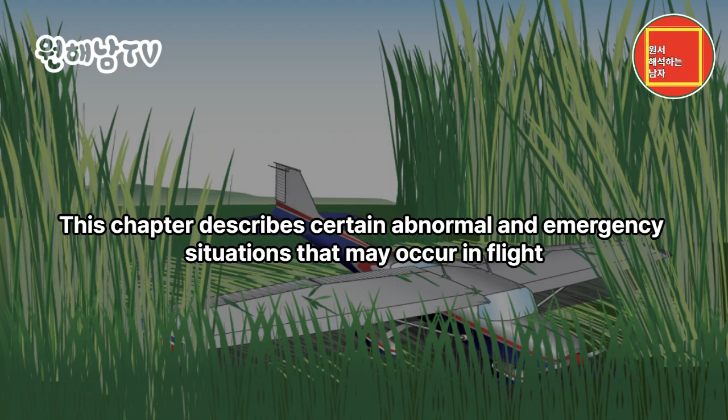This chapter describes certain abnormal and emergency situations that may occur in flight. The key to successful management of an emergency situation, and/or preventing an abnormal situation from progressing into a true emergency, is a thorough familiarity with and adherence to the procedures developed by the airplane manufacturer. The following guidelines are generic and are not meant to replace the airplane manufacturer's recommended procedures contained in the Federal Aviation Administration FAA-approved Airplane Flight Manual and/or Pilot's Operating Handbook, AFM/POH. Rather, they are meant to enhance the pilot's general knowledge in the area of abnormal and emergency operations. If any of the guidance in this chapter conflicts in any way with the manufacturer's recommended procedures for a particular make and model airplane, the manufacturer's recommended procedures take precedence.

Emergency landings. This section contains information on emergency landing techniques in small fixed-wing airplanes. The guidelines that are presented apply to the more adverse terrain conditions for which no practical training is possible. The objective is to instill in the pilot the knowledge that almost any terrain can be considered suitable for a survivable crash landing, if the pilot knows how to use the airplane structure for self-protection and the protection of passengers.

Types of emergency landings. The different types of emergency landings are defined as follows. Forced landing: an immediate landing, on or off an airport, necessitated by the inability to continue further flight, a typical example of which is an airplane forced down by engine failure. Precautionary landing: a premeditated landing, on or off an airport, when further flight is possible but inadvisable. Examples of conditions that may call for a precautionary landing include deteriorating weather, being lost, fuel shortage, and gradually developing engine trouble. Ditching: a forced or precautionary landing on water.

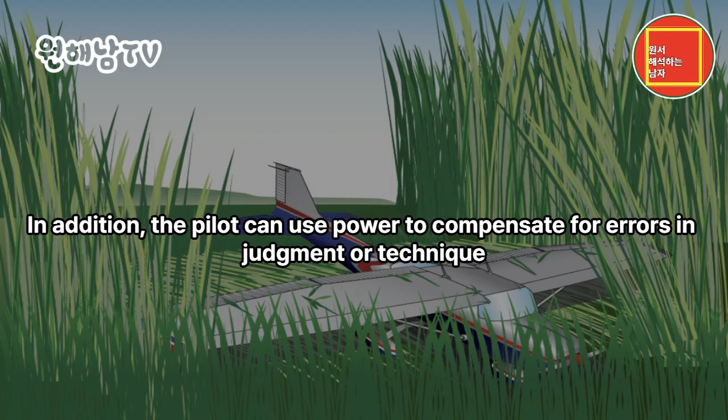A precautionary landing, generally, is less hazardous than a forced landing, because the pilot has more time for terrain selection in the planning of the approach. In addition, the pilot can use power to compensate for errors in judgment or technique. The pilot should be aware that too many situations calling for a precautionary landing are allowed to develop into immediate forced landings when the pilot uses wishful thinking instead of reason, especially when dealing with a self-inflicted predicament. The non-instrument rated pilot trapped by weather, or the pilot facing imminent fuel exhaustion, who does not give any thought to the feasibility of a precautionary landing, accepts an extremely hazardous alternative.

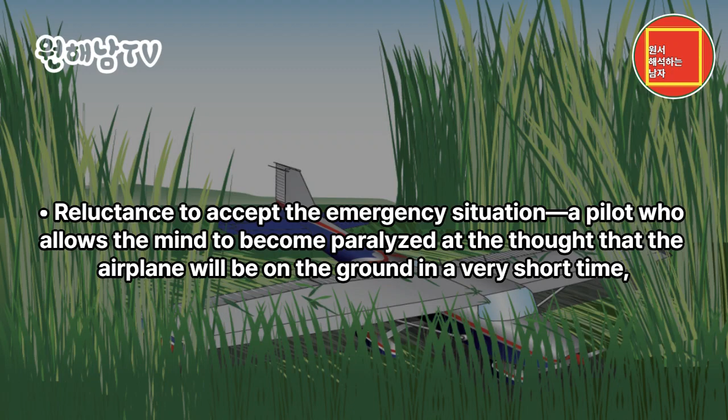Psychological hazards. There are several factors that may interfere with a pilot's ability to act promptly and properly when faced with an emergency. Some of these factors are listed below. Reluctance to accept the emergency situation: a pilot who allows the mind to become paralyzed at the thought that the airplane will be on the ground in a very short time, regardless of the pilot's actions or hopes, is severely handicapped in the handling of the emergency. An unconscious desire to delay the dreaded moment may lead to such errors as failure to lower the nose to maintain flying speed, delay in the selection of the most suitable landing area within reach, and indecision in general. Desperate attempts to correct whatever went wrong at the expense of airplane control fall into the same category.

Undue concern about getting hurt. Fear is a vital part of the self-preservation mechanism. However, when fear leads to panic, we invite that which we want most to avoid. The survival records favor pilots who maintain their composure and know how to apply the general concepts and procedures that have been developed through the years. The success of an emergency landing is as much a matter of the mind as of skills.

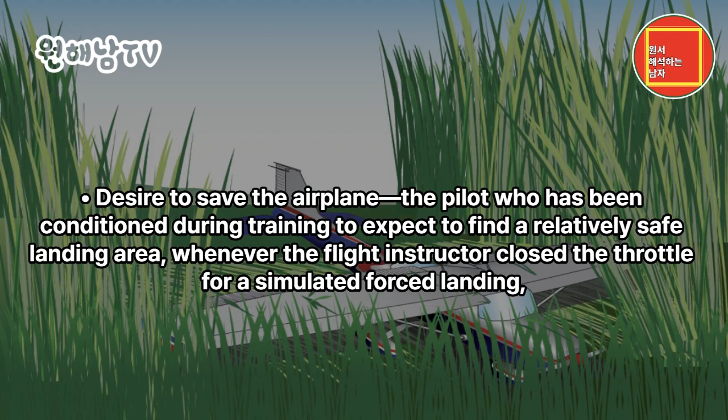Desire to save the airplane. The pilot who has been conditioned during training to expect to find a relatively safe landing area, whenever the flight instructor closed the throttle for a simulated forced landing, may ignore all basic rules of airmanship to avoid a touchdown in terrain where airplane damage is unavoidable. Typical consequences are making a 180 degree turn back to the runway when available altitude is insufficient, stretching the glide without regard for minimum control speed in order to reach a more appealing field, and accepting an approach and touchdown situation that leaves no margin for error.

The desire to save the airplane, regardless of the risks involved, may be influenced by two other factors: the pilot's financial stake in the airplane, and the certainty that an undamaged airplane implies no bodily harm. There are times, however, when a pilot should be more interested in sacrificing the airplane so that the occupants can safely walk away from it.

Basic safety concepts. General. A pilot who is faced with an emergency landing in terrain that makes extensive airplane damage inevitable should keep in mind that the avoidance of crash injuries is largely a matter of: one, keeping the vital structure, the cabin area, relatively intact by using dispensable structure, i.e., wings, landing gear, fuselage bottom, to absorb the violence of the stopping process before it affects the occupants; and two, avoiding forceful bodily contact with interior structure. Avoiding forcible contact with interior structure is a matter of seat and body security.

Unless the occupant decelerates at the same rate as the surrounding structure, no benefit is realized from its relative intactness. The occupant is brought to a stop violently in the form of a secondary collision.

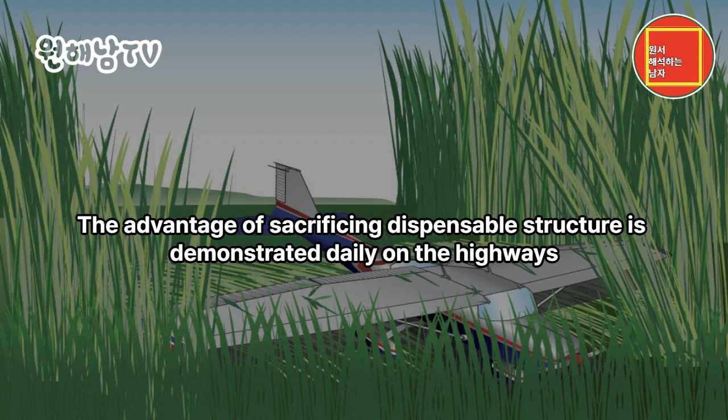The advantage of sacrificing dispensable structure is demonstrated daily on the highways. A head-on car impact against a tree at 20 miles per hour is less hazardous for a properly restrained driver than a similar impact against the driver's door.

Accident experience shows that the extent of crushable structure between the occupants and the principal point of impact on the airplane has a direct bearing on the severity of the transmitted crash forces and, therefore, on survivability.

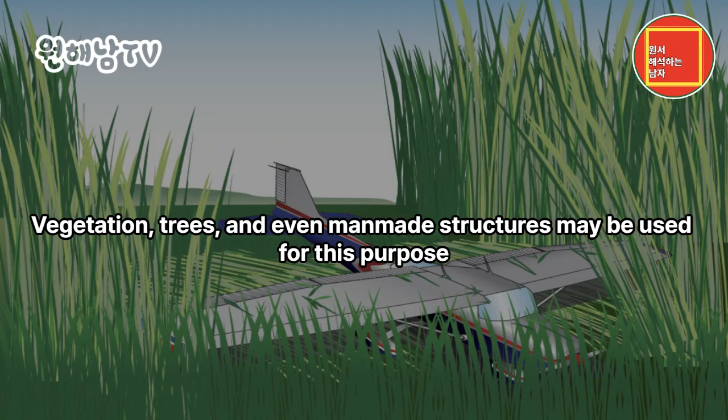Dispensable airplane structure is not the only available energy-absorbing medium in an emergency situation. Vegetation, trees, and even man-made structures may be used for this purpose. Cultivated fields with dense crops, such as mature corn and grain, are almost as effective in bringing an airplane to a stop with repairable damage as an emergency arresting device on a runway.

When dealing with natural and man-made obstacles with greater strength than the dispensable airplane structure, the pilot should plan the touchdown in such a manner that only non-essential structure is used up in the principal slowing down process.

The overall severity of a deceleration process is governed by speed, ground speed, and stopping distance. The most critical of these is speed. Doubling the ground speed means quadrupling the total destructive energy and vice versa. Even a small change in ground speed at touchdown, be it as a result of wind or pilot technique, affects the outcome of a controlled crash.

It is important that the actual touchdown during an emergency landing be made at the lowest possible controllable airspeed, using all available aerodynamic devices. Most pilots instinctively, and correctly, look for the largest available flat and open field for an emergency landing. Actually, very little stopping distance is required if the speed can be dissipated uniformly.

That is, if the deceleration forces can be spread evenly over the available distance. This concept is designed into the arresting gear of aircraft carriers that provides a nearly constant stopping force from the moment of hookup. The typical light airplane is designed to provide protection in crash landings that expose the occupants to 9 times the acceleration of gravity, 9g, in a forward direction.

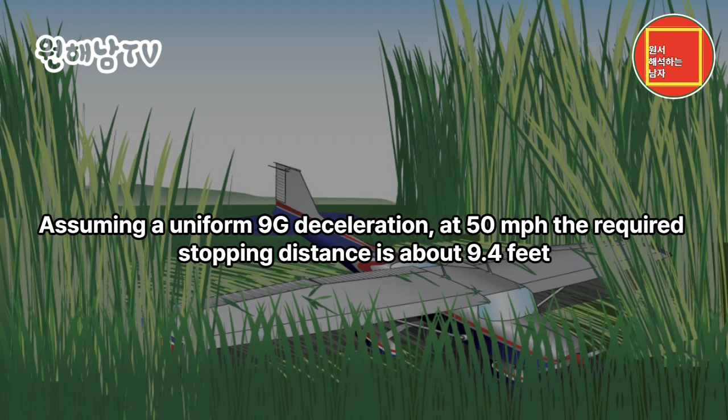Assuming a uniform 9g deceleration, at 50 miles per hour the required stopping distance is about 9.4 feet. While at 100 miles per hour, the stopping distance is about 37.6 feet, about 4 times as great.

Figure 18.2. Although these figures are based on an ideal deceleration process, it is interesting to note what can be accomplished in an effectively used short stopping distance.

Understanding the need for a firm but uniform deceleration process in very poor terrain enables the pilot to select touchdown conditions that spread the breakup of dispensable structure over a short distance, thereby reducing the peak deceleration of the cabin area. Attitude and sink rate control.

The most critical and often the most inexcusable error that can be made in the planning and execution of an emergency landing, even in ideal terrain, is the loss of initiative over the airplane's attitude and sink rate at touchdown.

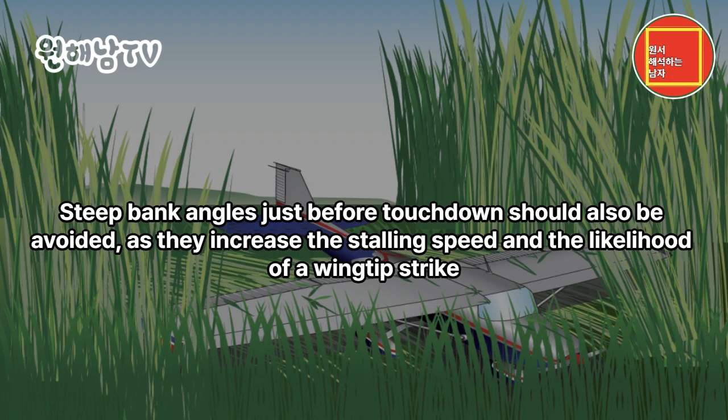When the touchdown is made on flat, open terrain, an excessive nose-low pitch attitude brings the risk of sticking the nose in the ground. Steep bank angles just before touchdown should also be avoided, as they increase the stalling speed and the likelihood of a wingtip strike.

Since the airplane's vertical component of velocity is immediately reduced to zero upon ground contact, it should be kept well under control. A flat touchdown at a high sink rate, well in excess of 500 feet per minute (fpm), on a hard surface can be injurious without destroying the cabin structure, especially during gear-up landings in low-wing airplanes.

A rigid bottom construction of these airplanes may preclude adequate cushioning by structural deformation. Similar impact conditions may cause structural collapse of the overhead structure in high-wing airplanes. On soft terrain, an excessive sink rate may cause digging in of the lower nose structure and severe forward deceleration.

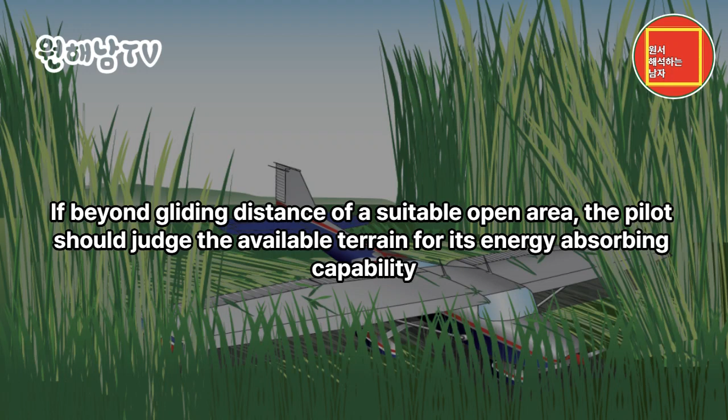If the emergency starts at a considerable height above the ground, the pilot should be more concerned about first selecting the desired general area than a specific spot.

Terrain appearances from altitude can be very misleading, and considerable altitude may be lost before the best spot can be pinpointed. For this reason, the pilot should not hesitate to discard the original plan for one that is obviously better.

However, as a general rule, the pilot should not change his or her mind more than once. A well-executed crash landing in poor terrain can be less hazardous than an uncontrolled touchdown on an established field.

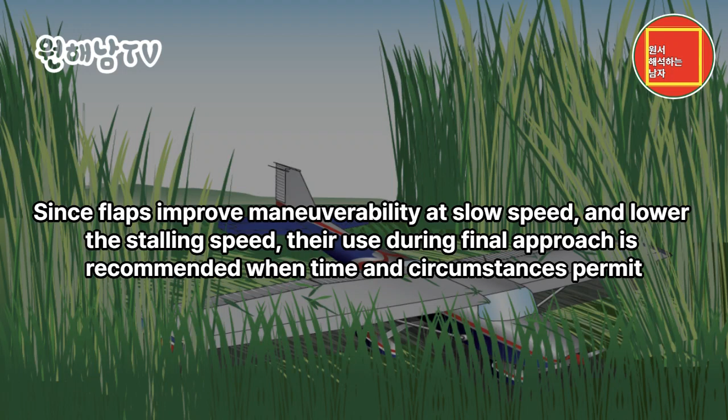Airplane configuration: since flaps improve maneuverability at slow speed and lower the stalling speed, their use during final approach is recommended when time and circumstances permit.

However, the associated increase in drag and decrease in gliding distance call for caution in the timing and the extent of their application. Premature use of flaps and dissipation of altitude may jeopardize an otherwise sound plan.

A hard and fast rule concerning the position of a retractable landing gear at touchdown cannot be given. In rugged terrain and trees, or during impacts at high sink rate, an extended gear would definitely have a protective effect on the cabin area.

However, this advantage has to be weighed against the possible side effects of a collapsing gear, such as a ruptured fuel tank. As always, the manufacturer's recommendations as outlined in the AFM/POH should be followed.

When a normal touchdown is assured, and ample stopping distance is available, a gear-up landing on level but soft terrain or across a plowed field may result in less airplane damage than a gear-down landing.

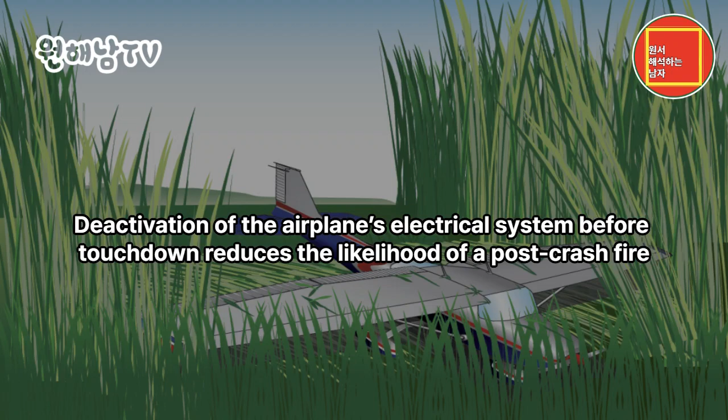Figure 18.3: Deactivation of the airplane's electrical system before touchdown reduces the likelihood of a post-crash fire. However, the battery master switch should not be turned off until the pilot no longer has any need for electrical power to operate vital airplane systems.

Positive airplane control during the final part of the approach has priority over all other considerations, including airplane configuration and checklist tasks. The pilot should attempt to exploit the power available from an irregularly running engine.

However, it is generally better to switch the engine and fuel off just before touchdown. This not only ensures the pilot's initiative over the situation, but a cooled-down engine reduces the fire hazard considerably.

Approach: when the pilot has time to maneuver, the planning of the approach should be governed by three factors: wind direction and velocity, dimensions and slope of the chosen field, and obstacles in the final approach path.

These three factors are seldom compatible. When compromises have to be made, the pilot should aim for a wind-obstacle-terrain combination that permits a final approach with some margin for error in judgment or technique.

A pilot who overestimates the gliding range may be tempted to stretch the glide across obstacles in the approach path. For this reason, it is sometimes better to plan the approach over an unobstructed area, regardless of wind direction.

Experience shows that a collision with obstacles at the end of a ground roll or slide is much less hazardous than striking an obstacle at flying speed before the touchdown point is reached.

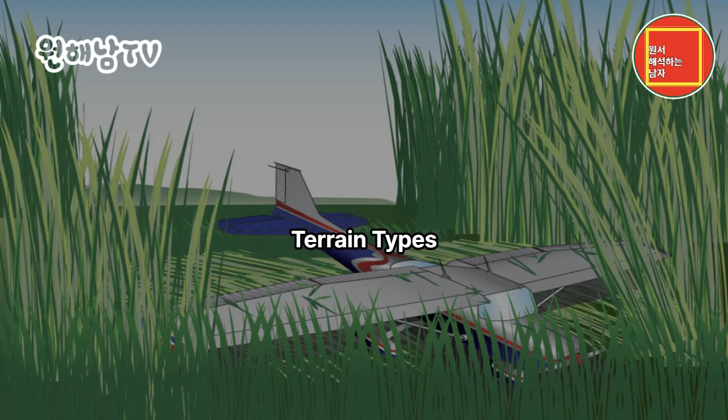Terrain types: since an emergency landing on suitable terrain resembles a situation the pilot should be familiar with through training, only the more unusual situations are discussed.

Confined areas: the natural preference to set the airplane down on the ground should not lead to the selection of an open spot between trees or obstacles, where the ground cannot be reached without making a steep descent.

Once the intended touchdown point is reached, and the remaining open and unobstructed space is very limited, it may be better to force the airplane down on the ground than to delay touchdown until it stalls or settles.

An airplane decelerates faster after it is on the ground than while airborne. Thought may also be given to the desirability of ground looping or retracting the landing gear in certain conditions.

A river or creek can be an inviting alternative in otherwise rugged terrain. The pilot should ensure that the water or creek bed can be reached without snagging the wings.

The same concept applies to road landings, with one additional reason for caution: man-made obstacles on either side of a road may not be visible until the final portion of the approach. When planning the approach across a road, remember that most highways and even rural dirt roads are paralleled by power or telephone lines.

Only a sharp lookout for the supporting structures or poles may provide timely warning. Trees, forest: although a tree landing is not an attractive prospect, the following general guidelines help make the experience survivable. Use the normal landing configuration, full flaps, gear down.

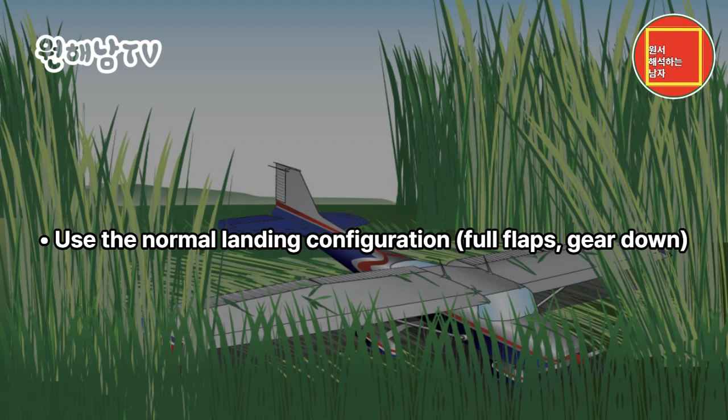Keep the ground speed low by heading into the wind. Make contact at minimum indicated airspeed, but not below stall speed, and hang the airplane in the tree branches in a nose-high landing attitude, involving the underside of the fuselage and both wings. Initial tree contact provides a more even and positive cushioning effect, while preventing penetration of the windshield.

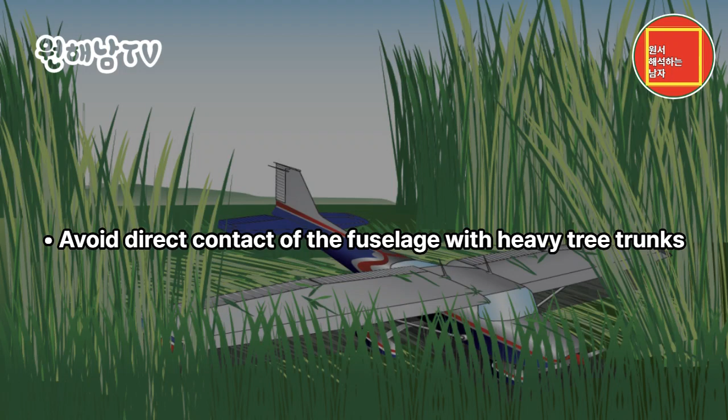Avoid direct contact of the fuselage with heavy tree trunks. Low, closely spaced trees with wide, dense crowns and branches close to the ground are much better than tall trees with thin tops. The latter allow too much free fall height.

A free fall from 75 feet results in an impact speed of about 40 knots, or about 4,000 feet per minute. Ideally, initial tree contact should be symmetrical, with both wings meeting equal resistance in the branches. This distribution of the load helps maintain proper airplane attitude, and may also preclude the loss of one wing, which invariably leads to a more rapid and less predictable descent.

To the ground. If heavy tree trunk contact is unavoidable once the airplane is on the ground, it is best to involve both wings simultaneously by directing the airplane between two properly spaced trees. Do not attempt this maneuver, however, while still airborne.

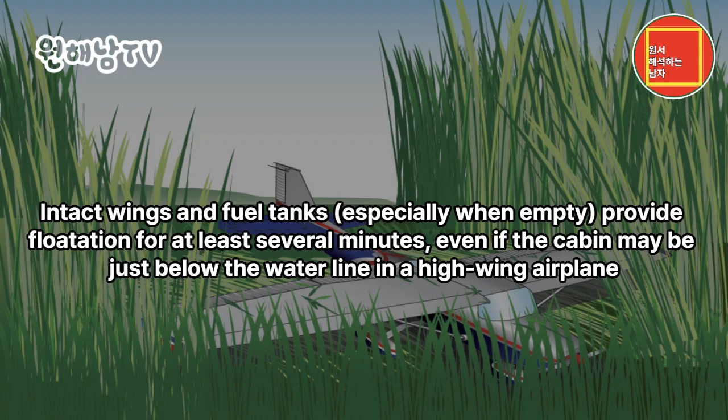Water ditching and snow. A well-executed water landing normally involves less deceleration violence than a poor tree landing or a touchdown on extremely rough terrain. Also, an airplane that is ditched at minimum speed and in a normal landing attitude does not immediately sink upon touchdown. Intact wings and fuel tanks, especially when empty, provide flotation for at least several minutes, even if the cabin may be just below the water line in a high-wing airplane.

Loss of depth perception may occur when landing on a wide expanse of smooth water, with the risk of flying into the water or stalling in from excessive altitude. To avoid this hazard, the airplane should be dragged in when possible. Use no more than intermediate flaps on low-wing airplanes, since the water resistance of fully extended flaps may result in asymmetrical flap failure and slowing of the airplane. Keep a retractable gear up unless the AFM/POH advises otherwise.

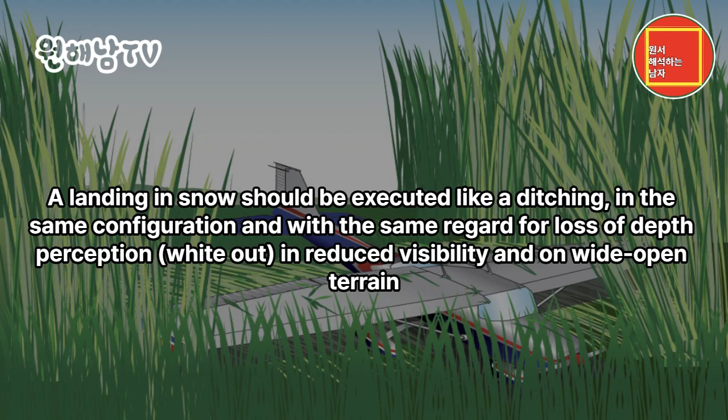A landing in snow should be executed like a ditching, in the same configuration and with the same regard for loss of depth perception, or whiteout, in reduced visibility and on wide-open terrain.

Engine failure after takeoff, single engine. A number of variables and pilot actions factor into a successful emergency landing shortly after takeoff. When an engine failure occurs during the initial climb, the pilot should lower the nose of the airplane and establish the proper glide attitude. What happens next if the engine does not restart?

Does the pilot select a field directly ahead, or slightly to the side of the takeoff path, or should the pilot turn back toward the point of departure? There's not much time to decide and a lot to consider. Continuing straight ahead or making a slight turn gives the pilot time to establish a safe landing attitude, and the landing occurs under control and as slowly as possible, assuming a takeoff made into a headwind. This minimizes the risk of injury and usually represents the option with the lowest risk, the safest option.

Turning back requires a more complex analysis and consideration of risk. At some urban airports, there may be numerous hazards in the departure path. In that case, the pilot might turn back, but only if certain the airplane can reach the field from its current position, and the pilot has trained and practiced the turn-back maneuver.

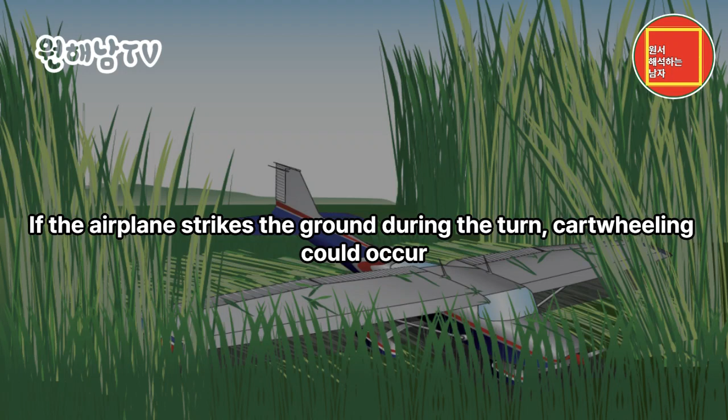Turning back to an airport after a low-altitude engine failure, also known as the impossible turn, presents many challenges, and a pilot who attempts it without due consideration and training will need considerable luck to prevent disaster. If the airplane strikes the ground during the turn, cartwheeling could occur. If the pilot does not lower the nose sufficiently, an accelerated stall and fatal crash may occur. Even after executing a successful turn, a return to the airport often results in a downwind approach.

The increased ground speed could rush a pilot not properly trained for landing downwind, and the associated increase in kinetic energy raises the likelihood of serious injury if unable to make the field. If considering a turn back to the runway following an engine failure on takeoff, the pilot should know the expected altitude lost during the turn for the specific make and model airplane, as well as whether the airplane can physically glide back to the field after executing the turn.

Traditionally, the FAA has given the following example: an airplane has taken off and climbed to an altitude of 300 feet AGL when the engine fails. After a typical 4-second reaction time, the pilot elects to turn back to the runway. Using a standard rate, 3-degree-per-second turn, it takes 1 minute to turn 180 degrees. At a glide speed of 65 knots, the radius of the turn is 2,100 feet, so at the completion of the turn, the airplane is 4,200 feet to one side of the runway.

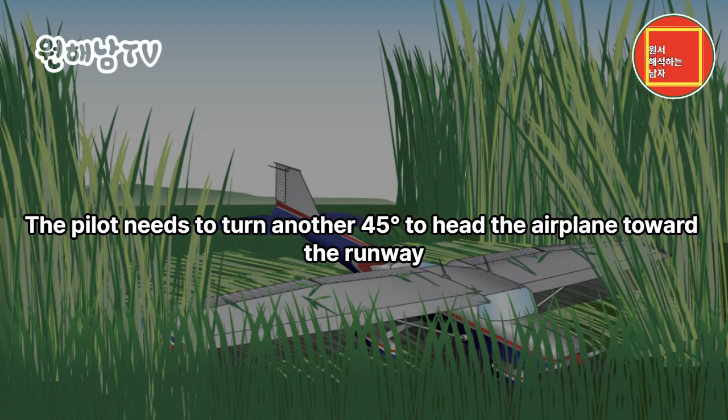The pilot needs to turn another 45 degrees to head the airplane toward the runway. By this time, the total change in direction is 225 degrees, equating to 75 seconds plus the 4-second reaction time. If the airplane in a power-off glide descends at approximately 1,000 fpm, it has descended 1,316 feet, placing it 1,016 feet below the runway.

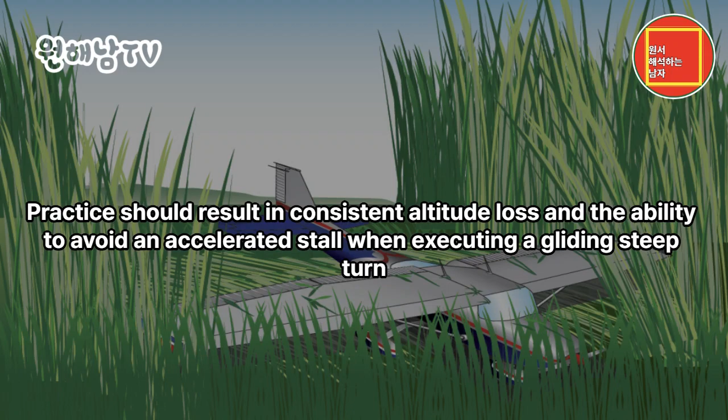The preceding example illustrates why a turn back, if attempted, requires a turn with a higher bank angle. A standard rate or shallow turn consumes too much time, requires too much distance, and generates an unacceptable solution. Training for a turn back includes practicing turns in both directions at a safe altitude in the make and model flown. After simulating an engine failure from a climb, practice should result in consistent altitude loss and the ability to avoid an accelerated stall when executing a gliding steep turn.

Pilots should be alert for and respond appropriately to any stall warning and reduce wing loading during the turn as necessary. There will be some observed variation in altitude loss during training. The pilot should anticipate that during an actual emergency, the expected altitude loss could end up at the high end of the range observed while practicing.

Success in training involves the demonstrated ability to evaluate the effect of climb performance of the airplane, determine the better direction to turn back, usually into a crosswind, predict the altitude above ground after the turn, know the distance to the landing zone, and know if the glide performance of the airplane will allow the pilot to make the field. Some airplanes cannot usually make the return successfully, some can make the return under certain conditions, and some can usually return. The pilot should not attempt to turn back unless a successful turn back will result.

A turn back to the departure runway may require more than a 180-degree change in direction. There could also be cases where turning back results in overshooting the runway, and the pilot needs to sense the aiming point within seconds after completing a turn back and make any necessary adjustments to achieve the best possible outcome.

A turn back at low altitudes presents an unacceptable risk for student pilots, low-time pilots, untrained pilots, pilots without adequate proficiency, and pilots flying airplanes with insufficient glide performance to return to the field. However, experienced pilots interested in knowing when and how to make an emergency turn back after takeoff should use the services of an authorized flight instructor, who can explain and demonstrate the practicality, or impracticality, of the impossible turn in the specific make and model used during training.

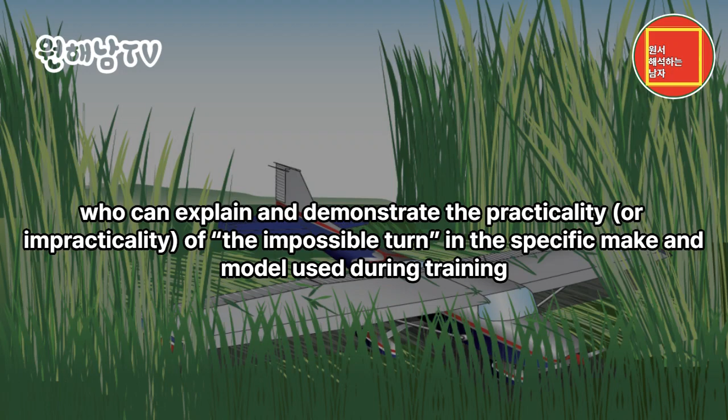Emergency descents: an emergency descent is a maneuver for descending as rapidly as possible to a lower altitude or to the ground for an emergency landing. The need for this maneuver may result from an uncontrollable fire, a sudden loss of cabin pressurization, or any other situation demanding an immediate and rapid descent.

The objective is to descend the airplane as soon and as rapidly as possible while not exceeding any structural limitations of the airplane. A simulated emergency descent should be made in a turn to check for other air traffic below and to look around for a possible emergency landing area. A radio call announcing descent intentions may be appropriate to alert other aircraft in the area. When initiating the descent, a bank of approximately 30 to 45 degrees should be established to maintain positive load factors (G-forces) on the airplane. Emergency descent training should be performed as recommended by the manufacturer, including the configuration and airspeeds.

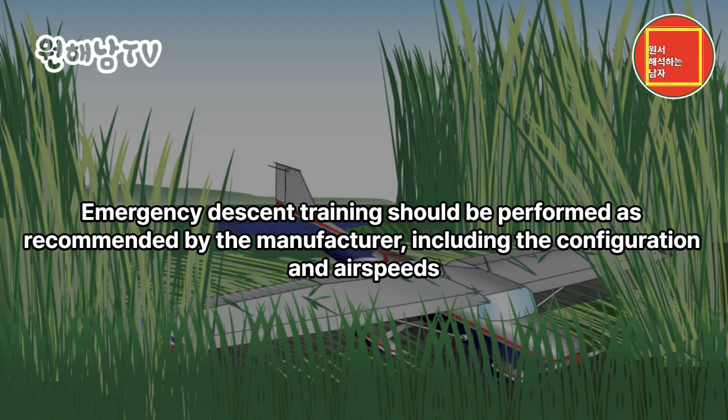Except when prohibited by the manufacturer, the power should be reduced to idle, and the propeller control, if equipped, should be placed in the low pitch, or high RPM, position. This allows the propeller to act as an aerodynamic brake to help prevent an excessive airspeed buildup during the descent.

The landing gear and flaps should be extended as recommended by the manufacturer. This provides maximum drag so the descent can be made as rapidly as possible without excessive airspeed. The pilot should not allow the airplane's airspeed to pass the never exceed speed, VNE, the maximum landing gear extended speed, VLE,

or the maximum flap extended speed, VFE, as applicable. In the case of an engine fire, a high airspeed descent could blow out the fire. However, weakening of the airplane structure is a major concern, and descent at low airspeed would place less stress on the airplane. If the descent is conducted in turbulent conditions, the pilot also needs to comply with the design maneuvering speed, VA, limitations. The descent should be made at the maximum allowable airspeed consistent with the procedure used. This provides increased drag and a high rate of descent.

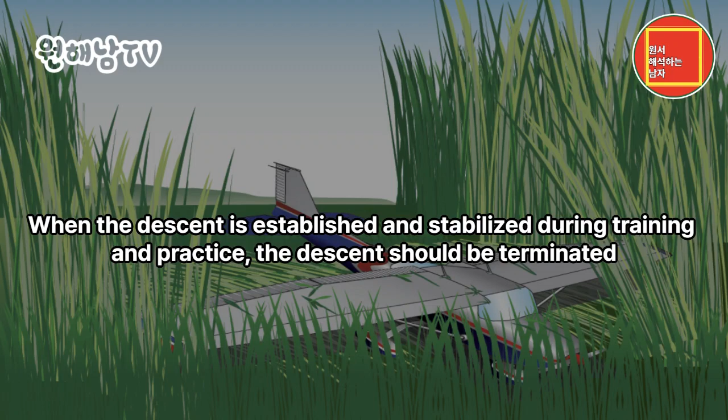The recovery from an emergency descent should be initiated at a high enough altitude to ensure a safe recovery back to level flight or a precautionary landing. When the descent is established and stabilized during training and practice, the descent should be terminated. In airplanes with piston engines, prolonged practice of emergency descent should be avoided to prevent excessive cooling of the engine cylinders.

In-flight fire. A fire in flight demands immediate and decisive action. The pilot should be familiar with the procedures outlined to meet this emergency contained in the AFM/POH for the particular airplane. For the purposes of this handbook, in-flight fires are classified as in-flight engine fires, electrical fires, and cabin fires.

Engine fire. An in-flight engine compartment fire is usually caused by a failure that allows a flammable substance, such as fuel, oil, or hydraulic fluid, to come in contact with a hot surface. This may be caused by a mechanical failure of the engine itself, an engine-driven accessory, a defective induction or exhaust system, or a broken line.

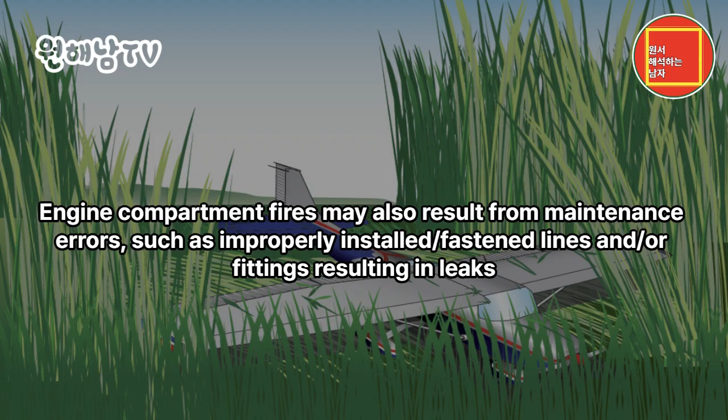Engine compartment fires may also result from maintenance errors, such as improperly installed/fastened lines and/or fittings resulting in leaks. Engine compartment fires can be indicated by smoke and/or flames coming from the engine cowling area. They can also be indicated by discoloration, bubbling, and/or melting of the engine cowling skin in cases where flames and/or smoke are not visible to the pilot. By the time a pilot becomes aware of an in-flight engine compartment fire, it usually is well developed.

Unless the airplane manufacturer directs otherwise in the AFM/POH, the first step on discovering a fire should be to shut off the fuel supply to the engine by placing the mixture control in the idle cutoff position and the fuel selector shutoff valve to the off position. The ignition switch should be left on in order to use up the fuel that remains in the fuel lines and components between the fuel selector shutoff valve and the engine. This procedure may starve the engine compartment of fuel and cause the fire to die naturally.

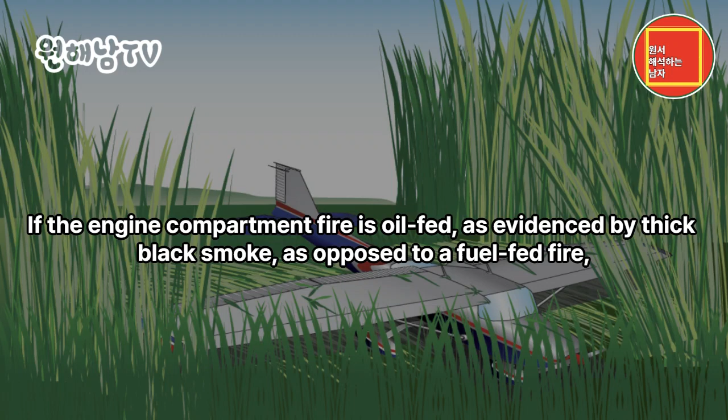If the flames are snuffed out, no attempt should be made to restart the engine. If the engine compartment fire is oil-fed, as evidenced by thick black smoke, as opposed to a fuel-fed fire, which produces bright orange flames, the pilot should consider stopping the propeller rotation by feathering or other means, such as, with constant speed propellers, placing the pitch control lever to the minimum RPM position and raising the nose to reduce airspeed until the propeller stops rotating.

This procedure stops an engine-driven oil, or hydraulic, pump from continuing to pump the flammable fluid that is feeding the fire. Some light airplane emergency checklists direct the pilot to shut off the electrical master switch.

However, the pilot should consider that unless the fire is electrical in nature, or a crash landing is imminent, deactivating the electrical system prevents the use of panel radios for transmitting distress messages and also causes air traffic control (ATC) to lose transponder returns. Pilots of powerless single-engine airplanes are left with no choice but to make a forced landing.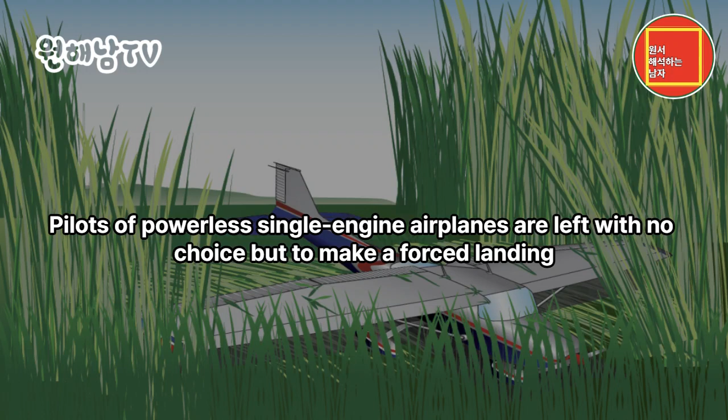Pilots of twin-engine airplanes may elect to continue the flight to the nearest airport. However, consideration should be given to the possibility that a wing could be seriously impaired and lead to structural failure. Even a brief but intense fire could cause dangerous structural damage. In some cases, the fire could continue to burn under the wing, or engine cowling in the case of a single-engine airplane, out of view of the pilot.

Engine compartment fires that appear to have been extinguished have been known to rekindle with changes in airflow pattern and airspeed. The pilot should be familiar with the airplane's emergency descent procedures. The pilot should also bear in mind the following.

The airplane may be severely structurally damaged to the point that its ability to remain under control could be lost at any moment. The airplane may still be on fire and susceptible to explosion. The airplane is expendable, and the only thing that matters is the safety of those on board.

Electrical fires. The initial indication of an electrical fire is usually the distinct odor of burning insulation. Once an electrical fire is detected, the pilot should attempt to identify the faulty circuit by checking circuit breakers, instruments, avionics, and lights. If the faulty circuit cannot be readily detected and isolated, and flight conditions permit, the battery master switch and alternator/generator switches should be turned off to remove the possible source of the fire.

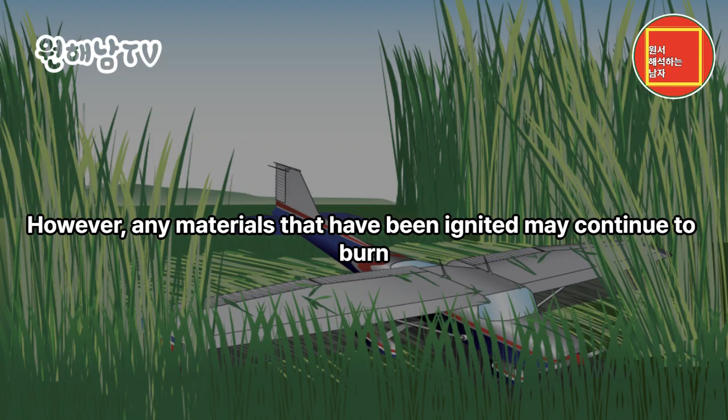However, any materials that have been ignited may continue to burn. If electrical power is absolutely essential for the flight, an attempt may be made to identify and isolate the faulty circuit by: one, turning the electrical master switch off.

Two, turning all individual electrical switches off. Three, turning the master switch back on. Four, selecting electrical switches that were on before the fire indication one at a time, permitting a short time lapse after each switch is turned on to check for signs of odor, smoke, or sparks.

This procedure, however, has the effect of recreating the original problem. The most prudent course of action is to land as soon as possible.

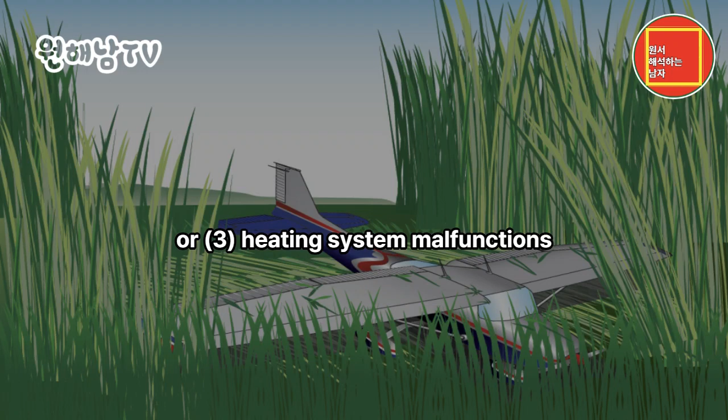Cabin fire. Cabin fires generally result from one of three sources: one, careless smoking on the part of the pilot and/or passengers; two, electrical system malfunctions; or three, heating system malfunctions. A fire in the cabin presents the pilot with two immediate demands: attacking the fire and getting

the airplane safely on the ground as quickly as possible. A fire or smoke in the cabin should be controlled by identifying and shutting down the faulty system.

In many cases, smoke may be removed from the cabin by opening the cabin air vents. This should be done only after the fire extinguisher, if available, is used. Then the cabin air control can be opened to purge the cabin of both smoke and fumes.

If smoke increases in intensity when the cabin air vents are opened, they should be immediately closed. This indicates a possible fire in the heating system, nose compartment baggage area, if so equipped, or that the increase in airflow is feeding the fire.

On pressurized airplanes, the pressurization air system removes smoke from the cabin. However, if the smoke is intense, it may be necessary to either depressurize at altitude, if oxygen is available for all occupants, or execute an emergency descent.

In unpressurized single-engine and light twin-engine airplanes, the pilot can attempt to expel the smoke from the cabin by opening the foul weather windows. These windows should be closed immediately if the fire becomes more intense.

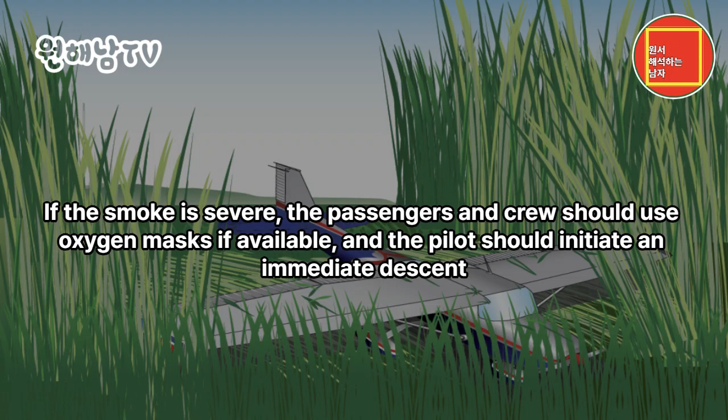If the smoke is severe, the passengers and crew should use oxygen masks if available, and the pilot should initiate an immediate descent. The pilot should also be aware that on some airplanes, lowering the landing gear and/or wing flaps can aggravate a cabin smoke problem.

Flight control malfunction/failure. Total flap failure. The inability to extend the wing flaps necessitates a no-flap approach and landing. In light airplanes, a no-flap approach and landing is not particularly difficult or dangerous. However, there are certain factors that should be considered in the execution of this maneuver.

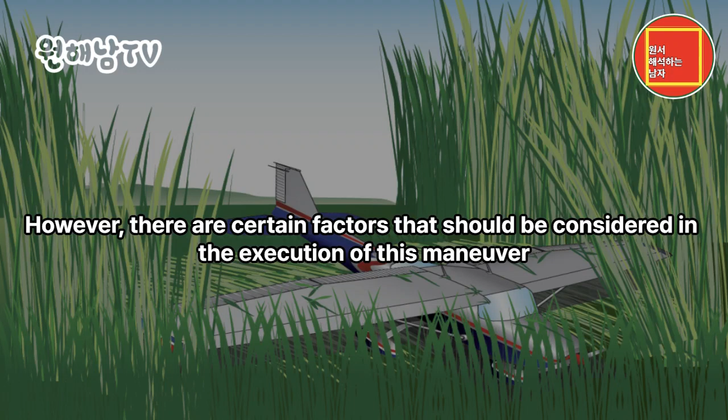A no-flap landing requires substantially more runway than normal. The increase in required landing distance could be as much as 50%.

When flying in the traffic pattern with the wing flaps retracted, the airplane should be flown in a relatively nose-high attitude to maintain altitude, as compared to flight with flaps extended. Losing altitude can be more of a problem without the benefit of the drag normally provided by flaps.

A wider, longer traffic pattern may be required in order to avoid the necessity of diving to lose altitude and consequently building up excessive airspeed.

On final approach, a nose-high attitude can make it difficult to see the runway. This situation, if not anticipated, can result in serious errors in judgment of height and distance.

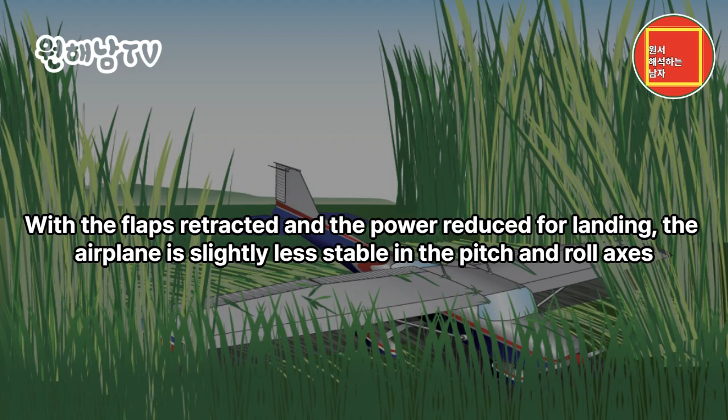Approaching the runway in a relatively nose-high attitude can also cause the perception that the airplane is close to a stall. This may cause the pilot to lower the nose abruptly and risk touching down on the nose wheel. With the flaps retracted and the power reduced for landing, the airplane is slightly less stable in the pitch and roll axes.

Without flaps, the airplane tends to float considerably during round-out. The pilot should avoid the temptation to force the airplane onto the runway at an excessively high speed. Neither should the pilot flare excessively because without flaps, this might cause the tail to strike the runway.

Asymmetric, split flap. An asymmetric split flap situation is one in which one flap deploys or retracts while the other remains in position. The problem is indicated by a pronounced roll toward the wing with the least flap deflection when wing flaps are extended or retracted.

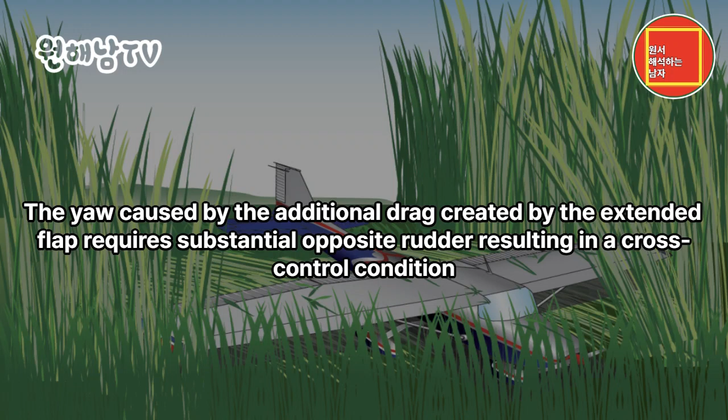The roll encountered in a split flap situation is countered with opposite aileron. The yaw caused by the additional drag created by the extended flap requires substantial opposite rudder, resulting in a cross-control condition. Almost full aileron may be required to maintain a wings-level attitude, especially at the reduced airspeed necessary for approach and landing.

The pilot should not attempt to land with a crosswind from the side of the deployed flap, because the additional roll control required to counteract the crosswind may not be available. The approach to landing with a split flap condition should be flown at a higher than normal airspeed.

The pilot should not risk an asymmetric stall and subsequent loss of control by flaring excessively. Rather, the airplane should be flown onto the runway so that the touchdown occurs at an airspeed consistent with a safe margin above flaps-up stall speed.

Loss of elevator control. In many airplanes, the elevator is controlled by two cables, a down cable and an up cable. Normally, a break or disconnect in only one of these cables does not result in a total loss of elevator control. In most airplanes, a failed cable results in a partial loss of pitch control.

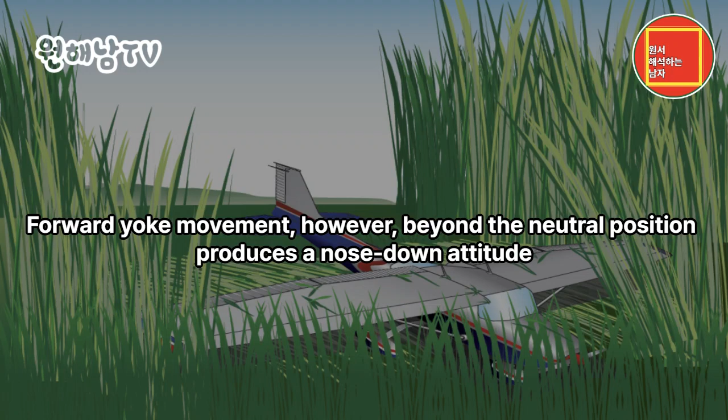In the failure of the up elevator cable, the down elevator being intact and functional, the control yoke moves aft easily but produces no response. Forward yoke movement, however, beyond the neutral position produces a nose-down attitude.

Conversely, with a failure of the down elevator cable, forward movement of the control yoke produces no effect. The pilot, however, has partial control of pitch attitude with aft movement.

When experiencing a loss of up elevator control, the pilot can retain pitch control by applying considerable nose-up trim, pushing the control yoke forward to attain and maintain desired attitude, increasing forward pressure to lower the nose and relaxing forward pressure to raise the nose, releasing forward pressure to flare for landing.

When experiencing a loss of down elevator control, the pilot can retain pitch control by applying considerable nose-down trim, pulling the control yoke aft to attain and maintain attitude, releasing back pressure to lower the nose and increasing back pressure to raise the nose, increasing back pressure to flare for landing.

Trim mechanisms can be useful in the event of an in-flight primary control failure. For example, if the linkage between the cabin and the elevator fails in flight, leaving the elevator free to weather-vane in the wind, the trim tab can be used to raise or lower the elevator within limits.

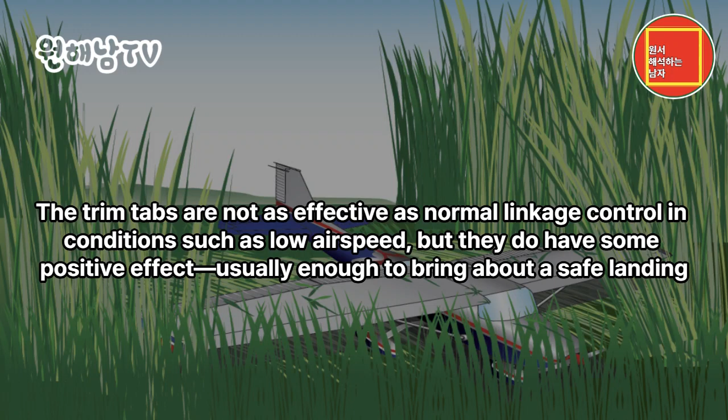The trim tabs are not as effective as normal linkage control in conditions such as low airspeed, but they do have some positive effect, usually enough to bring about a safe landing.

If an elevator becomes jammed, resulting in a total loss of elevator control movement, various combinations of power and flap extension offer a limited amount of pitch control. A successful landing under these conditions, however, can be problematic.

Landing gear malfunction. Once the pilot has confirmed that the landing gear has in fact malfunctioned, in that one or more gear legs refuses to respond to the conventional or alternate methods of gear extension contained in the AFM/POH, a gear-up landing is considered inevitable.

The pilot should select an airport with crash and rescue facilities. If possible, the pilot should not hesitate to request that emergency equipment is standing by.

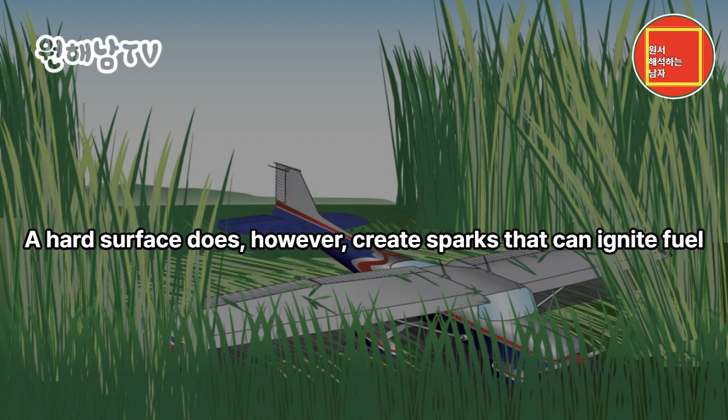When selecting a landing surface, the pilot should consider that a smooth, hard surface runway usually causes less damage than a rough, unimproved grass strip. A hard surface does, however, create sparks that can ignite fuel. If the airport is so equipped, the pilot can request that the runway surface be foamed.

The pilot should consider burning off excess fuel. This reduces landing speed and fire potential.

If the landing gear malfunction is limited to one main landing gear leg, the pilot should consume as much fuel from that side of the airplane as practicable, thereby reducing the weight of the wing on that side. The reduced weight makes it possible to delay the unsupported wing from contacting the surface during the landing roll until the last possible moment. Reduced impact speeds result in less damage.

If only one landing gear leg fails to extend, the pilot has the option of landing on the available gear legs or landing with all the gear legs retracted.

Landing on only one main gear usually causes the airplane to veer strongly in the direction of the faulty gear leg after touchdown. If the landing runway is narrow and/or ditches and obstacles line the runway edge, maximum directional control after touchdown is a necessity. In this situation, a landing with all three gear retracted may be the safest course of action.

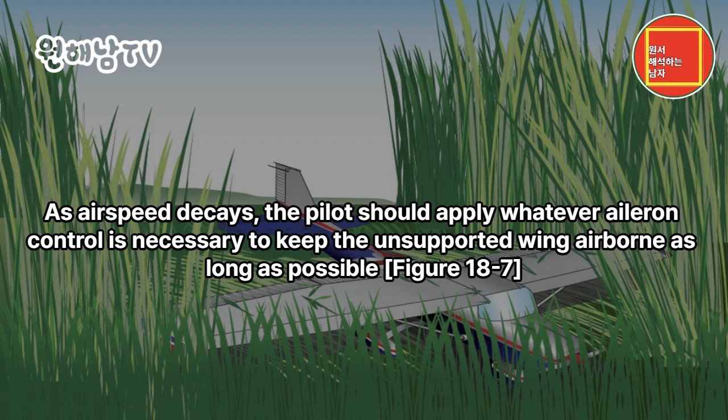If the pilot elects to land with one main gear retracted, and the other main gear and nose gear down and locked, the landing should be made in a nose-high attitude with wings level. As airspeed decays, the pilot should apply whatever aileron control is necessary to keep the unsupported wing airborne as long as possible. Once the wing contacts the surface, the pilot can anticipate a strong yaw in that direction.

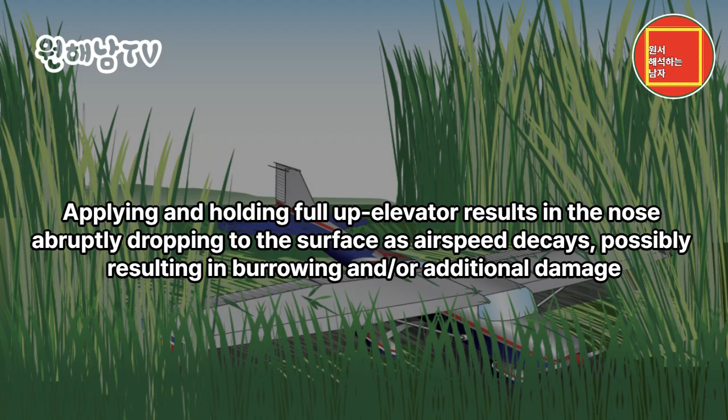When landing with a retracted nose wheel and the main gear extended and locked, the pilot should hold the nose off the ground until almost full-up elevator has been applied. The pilot should then release back pressure so that the nose settles slowly to the surface. Applying and holding full-up elevator results in the nose abruptly dropping to the surface as airspeed decays, possibly resulting in burrowing and/or additional damage. Brake pressure should not be applied during the landing roll unless absolutely necessary to avoid a collision with obstacles.

If the landing occurs with only the nose gear extended, the initial contact should be made on the aft fuselage structure with a nose-high attitude. This procedure helps prevent porpoising and/or wheelbarrowing. The pilot should then allow the nose wheel to gradually touch down, using nose wheel steering as necessary for directional control.

System malfunctions: electrical system. The loss of electrical power can deprive the pilot of numerous critical systems, and therefore should not be taken lightly. Even in day visual flight rules (VFR) conditions, most in-flight failures of the electrical system are located in the generator or alternator.

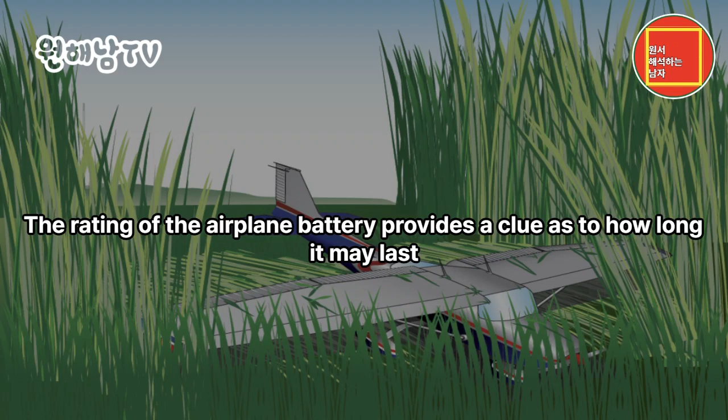Once the generator or alternator system goes offline, the electrical source in a typical light airplane is a battery. If a warning light or ammeter indicates the probability of an alternator or generator failure in an airplane with only one generating system, the pilot may have very little time available from the battery. The rating of the airplane battery provides a clue as to how long it may last. With batteries, the higher the amperage load, the faster any available stored energy gets consumed.

A 25 amp-hour battery could produce 5 amps per hour for 5 hours, but if the load were increased to 10 amps, it might last only 2 hours. A 40 amp load might discharge the battery fully in about 10 or 15 minutes. Much depends on the battery condition at the time of the system failure. If the battery has been in service for a few years, its power may be reduced substantially because of internal resistance. Or if the system failure was not detected immediately, much of the stored energy may have already been used.

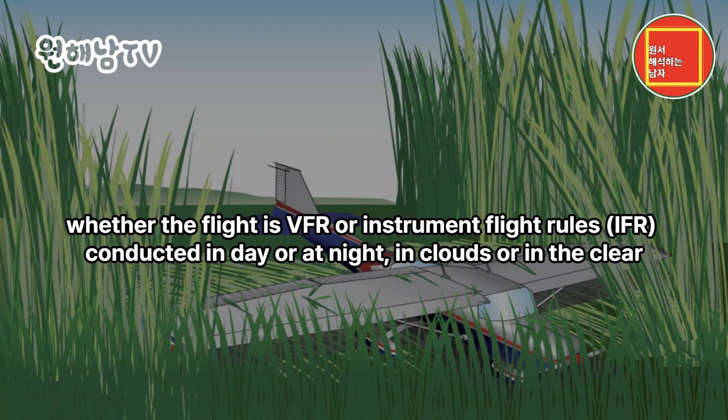It is essential, therefore, that the pilot immediately shed non-essential loads when the generating source fails. The pilot should then plan to land at the nearest suitable airport. What constitutes an emergency load following a generating system failure cannot be predetermined because the actual circumstances are always somewhat different. For example, whether the flight is VFR or Instrument Flight Rules (IFR), conducted in day or at night, in clouds or in the clear. Distance to nearest suitable airport can also be a factor.

The pilot should remember that the electrically powered, or electrically selected, landing gear and flaps do not function properly on the power left in a partially depleted battery. Landing gear and flap motors use power at rates much greater than most other types of electrical equipment. The result of selecting these motors on a partially depleted battery may well result in an immediate total loss of electrical power.

If the pilot expects an imminent and complete in-flight loss of electrical power, the following steps should be taken: Shed all but the most necessary electrically driven equipment. Understand that any loss of electrical power is critical in a small airplane. Notify ATC of the situation immediately. Request radar vectors for a landing at the nearest suitable airport. If landing gear or flaps are electrically controlled or operated, plan the arrival well ahead of time. Expect to make a no-flap landing and anticipate a manual landing gear extension.

Pitot-static system. The source of the pressure for operating the airspeed indicator, the vertical speed indicator (VSI), and the altimeter is the pitot-static system. The major components are the impact pressure chamber and lines and the static pressure chamber and lines, each of which are subject to total or partial blockage by ice, dirt, and/or other foreign matter. Blockage of the pitot-static system adversely affects instrument operation.

Figure 18.10. Partial static system blockage is insidious in that it may go unrecognized until a critical phase of flight. During takeoff, climb, and level off at cruise altitude, the altimeter, airspeed indicator, and VSI may operate normally. No indication of malfunction may be present until the airplane begins a descent.

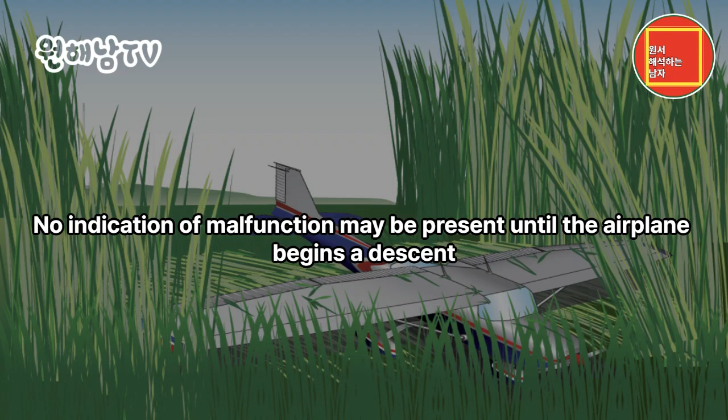If the static reference system is severely restricted, but not entirely blocked, as the airplane descends, the static reference pressure at the instruments begins to lag behind the actual outside air pressure. While descending, the altimeter may indicate that the airplane is higher than actual. Because the obstruction slows the airflow from the static port to the altimeter, the VSI confirms the altimeter's information regarding rate of change.

Because the reference pressure is not changing at the same rate as the outside air pressure, the airspeed indicator, unable to tell whether it is experiencing more airspeed, pitot pressure, or less static reference pressure, indicates a higher airspeed than actual. To the pilot, the instruments indicate that the airplane is too high, too fast, and descending at a rate much lower than desired.

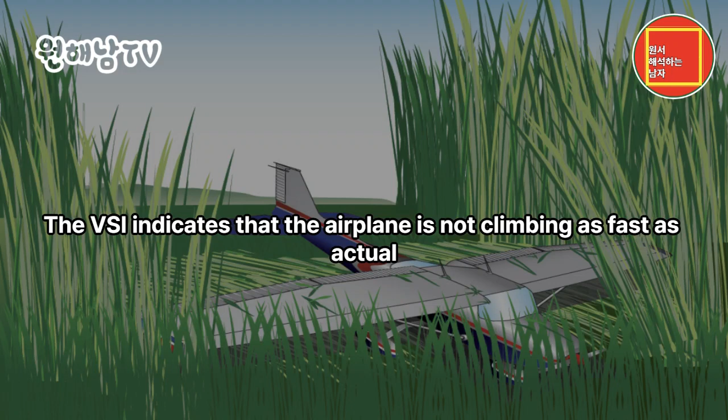If the pilot levels off and then begins a climb, the altitude indication may still lag. The VSI indicates that the airplane is not climbing as fast as actual. The indicated airspeed, however, may begin to decrease at an alarming rate. The least amount of pitch-up attitude may cause the airspeed needle to indicate dangerously near stall speed.

Managing a static system malfunction requires that the pilot know and understand the airplane's pitot-static system. If a system malfunction is suspected, the pilot should confirm it by opening the alternate static source. This should be done while the airplane is climbing or descending. If the instrument needles move significantly when this is done, a static pressure problem exists and the alternate source should be used during the remainder of the flight.

Failure of the pitot-static system may also have serious consequences for electronic flight instrument systems (EFIS). To satisfy the requirements of Title 14 of the Code of Federal Regulations, 14 CFR Part 23, Section 23.2615(b)(2), information essential for continued safe flight and landing will be available to the flight crew in a timely manner after any single failure or probable combination of failures.

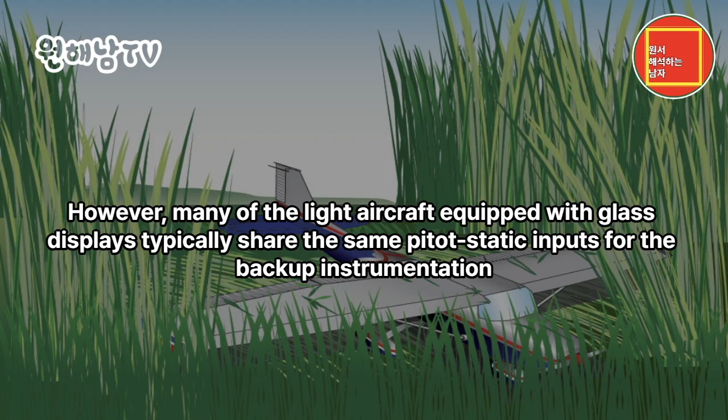However, many light aircraft equipped with glass displays typically share the same pitot-static inputs for the backup instrumentation. Since both systems are receiving the same input signals, both could fail if affected by obstructed or blocked pitot tubes and static ports, creating a difficult situation for a pilot flying in IMC. Some manufacturers combine both the Air Data Computer (ADC) and the Attitude and Heading Reference System (AHRS) functions, so that a blockage of the input system may also affect the attitude display.

With conventional instrumentation, the design and operation are similar regardless of aircraft or manufacturer. By comparing information between the six conventional instruments, pilots are able to diagnose common failure modes. Instrument failure indications of conventional instruments and electronic flight displays may be entirely different, and electronic systems failure indications are not standardized.

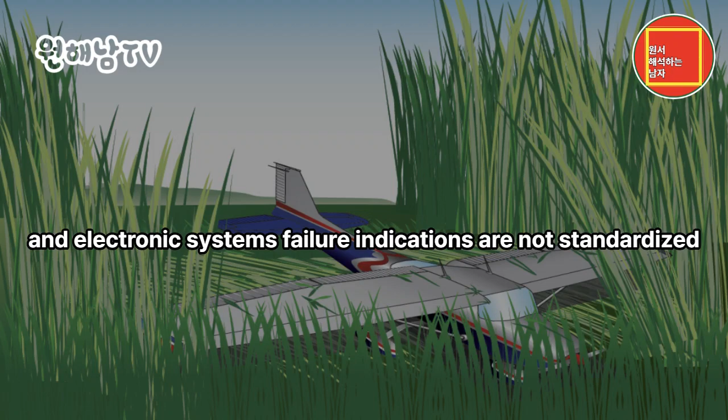With a wide diversity in system design of glass displays, the primary display and the backup display may respond differently to any interruption of data input, and both displays may function differently than conventional instruments under the same conditions. It is imperative for pilots to obtain equipment-specific information in reference to both the aircraft and the avionics that fully prepare them to interpret and properly respond to equipment malfunctions of electronic flight instrument displays.

Rapidly changing equipment, complex systems, and the difficulty or inability to simulate failure modes and functions can impose training limitations. Pilots still should be able to respond to equipment malfunctions in a timely manner without impairing other critical flight tasks should the need arise. Abnormal engine instrument indication.

The AFM/POH for the specific airplane contains information that should be followed in the event of any abnormal engine instrument indications. The table shown in Figure 18.11 offers generic information on some of the more commonly experienced in-flight abnormal engine instrument indications, their possible causes, and corrective actions.

Door opening in flight. In most instances, the occurrence of an inadvertent door opening is not of great concern to the safety of a flight, but rather, the pilot's reaction at the moment the incident happens.

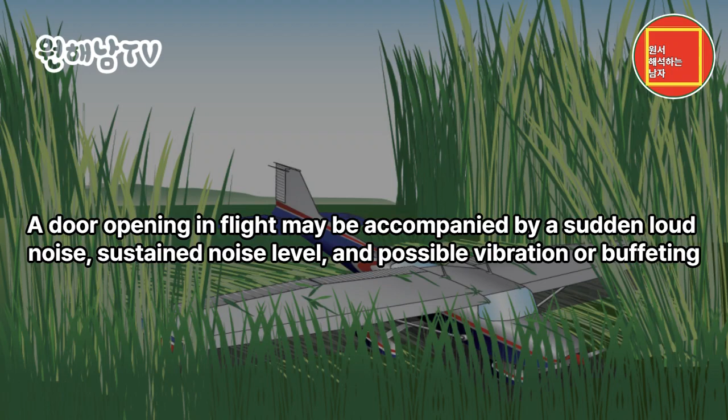A door opening in flight may be accompanied by a sudden loud noise, sustained noise level, and possible vibration or buffeting. If a pilot allows himself or herself to become distracted to the point where attention is focused on the open door, rather than maintaining control of the airplane, loss of control may result, even though disruption of airflow by the door is minimal.

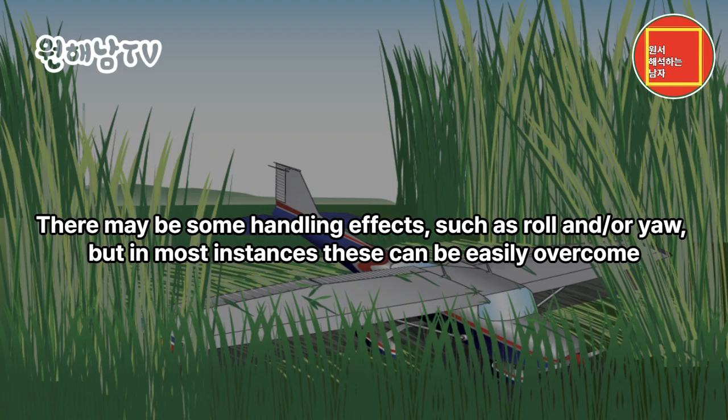Particularly in light single and twin-engine airplanes, a cabin door that opens in flight seldom if ever compromises the airplane's ability to fly. There may be some handling effects, such as roll and or yaw, but in most instances these can be easily overcome. If the door opens after liftoff, do not rush to land.

Climb to normal traffic pattern altitude, fly a normal traffic pattern, and make a normal landing. Do not release the seat belt and shoulder harness in an attempt to reach the door. Leave the door alone. Land as soon as practicable, and close the door once safely on the ground.

Remember that most doors do not stay wide open. They usually bang open and then settle partly closed. A slip towards the door may cause it to open wider. A slip away from the door may push it closed.

Do not panic. Try to ignore the unfamiliar noise and vibration. Also, do not rush. Attempting to get the airplane on the ground as quickly as possible may result in steep turns at low altitude. Complete all items on the landing checklist.

Remember that accidents are almost never caused by an open door. Rather, an open door accident is caused by the pilot's distraction or failure to maintain control of the airplane.

Inadvertent VFR flight into IMC. It is beyond the scope of this handbook to incorporate a course of training in basic attitude instrument flying. This information is contained in the Instrument Flying Handbook, FAA-H-8083-15.

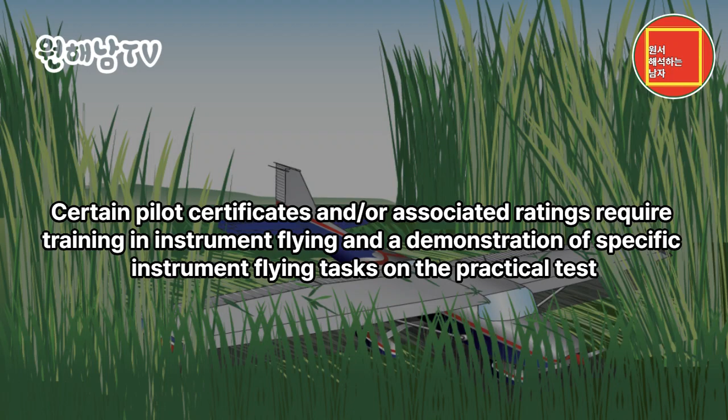Certain pilot certificates and/or associated ratings require training in instrument flying and a demonstration of specific instrument flying tasks on the practical test. Pilots and flight instructors should refer to the Instrument Flying Handbook, FAA-H-8083-15, for guidance in the performance of these tasks, and to the appropriate Airman Certification Standards, ACS, for information on the evaluation of tasks performed for the particular certificate level and/or rating.

The pilot should remember, however, that unless these tasks are practiced on a continuing and regular basis, skill erosion begins almost immediately. In a very short time, the pilot's assumed level of confidence is much higher than the performance he or she is actually able to demonstrate should the need arise.

Accident statistics show that the pilot who has not been trained in attitude instrument flying, or one whose instrument skills have eroded, loses control of the airplane in about 10 minutes once forced to rely solely on instrument references.

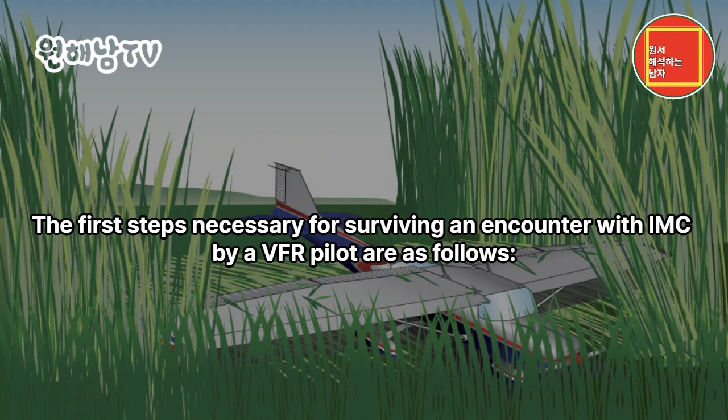The purpose of this section is to provide guidance on practical emergency measures to maintain airplane control for a limited period of time. In the event a VFR pilot encounters instrument meteorological conditions, IMC, the main goal is not precision instrument flying; rather, it is to help the VFR pilot keep the airplane under adequate control until suitable visual references are regained.

The first steps necessary for surviving an encounter with IMC by a VFR pilot are as follows: recognition and acceptance of the seriousness of the situation and the need for immediate remedial action, maintaining control of the airplane, and obtaining the appropriate assistance to get the airplane safely on the ground.

Recognition: anytime a VFR pilot is unable to maintain airplane attitude control by reference to the natural horizon, the condition is considered to be IMC, regardless of the circumstances or the prevailing weather conditions.

Whether the cause is inadvertent or intentional, the VFR pilot is, in effect, in IMC if unable to navigate or establish geographical position by visual reference to landmarks on the surface. These situations should be accepted by the pilot involved as a genuine emergency requiring appropriate action.

Pilots should understand that unless they are trained, qualified, and current in the control of an airplane solely by reference to flight instruments, they will be unable to do so for any length of time.

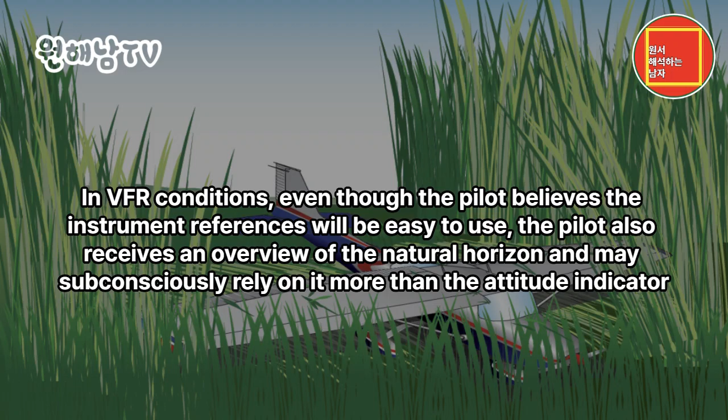Many hours of VFR flying using the attitude indicator as a reference for airplane control may lull pilots into a false sense of security, based on an overestimation of their personal ability to control the airplane solely by instrument references. In VFR conditions, even though the pilot believes the instrument references will be easy to use, the pilot also receives an overview of the natural horizon and may subconsciously rely on it more than the attitude indicator.

If the natural horizon were to suddenly disappear, the untrained instrument pilot would be subject to vertigo, spatial disorientation, and inevitable control loss. Once the pilot recognizes and accepts the situation, he or she should understand that the only way to control the airplane safely is by using and trusting the flight instruments.

Attempts to control the airplane partially by reference to flight instruments, while searching outside of the airplane for visual confirmation of the information provided by those instruments, results in inadequate airplane control. This may be followed by spatial disorientation and complete control loss.

The most important point to be stressed is that the pilot should not panic. The task at hand may seem overwhelming, and the situation may be compounded by extreme apprehension. However, the pilot should make a conscious effort to relax. The pilot needs to understand the most important concern, in fact the only concern at this point, is to keep

the wings level. An uncontrolled turn or bank usually leads to difficulty in achieving the objectives of any desired flight condition, but good bank control has the effect of making pitch control much easier. The pilot should remember that a person cannot feel control pressures with a tight grip on the controls.

Relaxing and learning to control with the eyes and the brain, instead of only the muscles, usually takes considerable conscious effort. The pilot needs to believe what the flight instruments show about the airplane's attitude regardless of what the natural senses tell. The vestibular sense, motion sensing by the inner ear, can and will confuse the pilot.

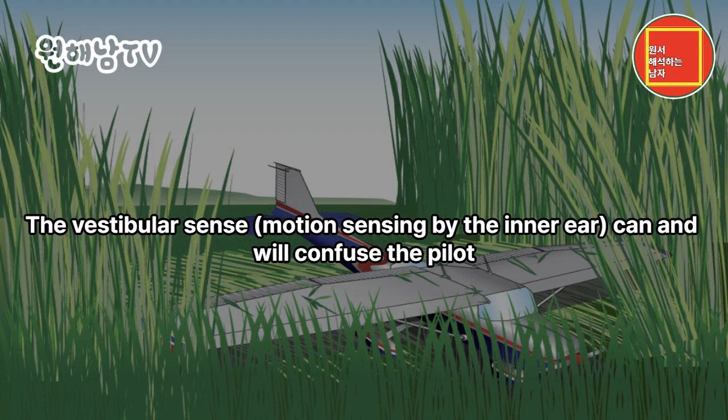Because of inertia, the sensory areas of the inner ear cannot detect slight changes in airplane attitude, nor can they accurately sense attitude changes that occur at a uniform rate over a period of time. On the other hand, false sensations are often generated, leading the pilot to believe the attitude of the airplane has changed when, in fact, it has not. These false sensations result in the pilot experiencing spatial disorientation.

Attitude control. An airplane is, by design, an inherently stable platform and, except in turbulent air, maintains approximately straight and level flight if properly trimmed and left alone. It is designed to maintain a state of equilibrium in pitch, roll, and yaw.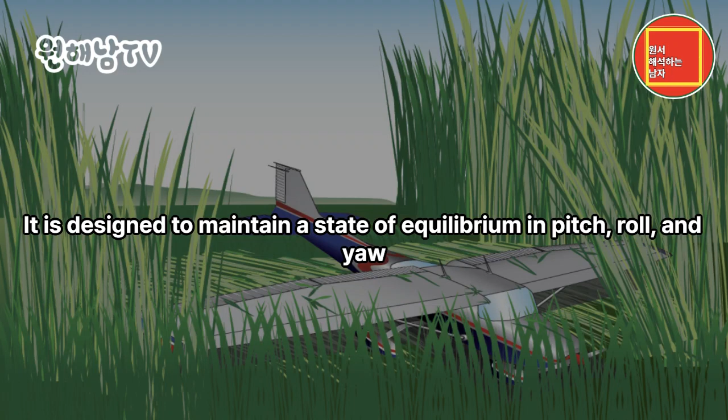The pilot should be aware, however, that a change about one axis affects the stability of the others. The typical light airplane exhibits a good deal of stability in the yaw axis, slightly less in the pitch axis, and even lesser still in the roll axis.

The key to emergency airplane attitude control, therefore, is to trim the airplane with the elevator trim so that it maintains hands-off level flight at cruise airspeed. Resist the tendency to over-control the airplane. Fly the attitude indicator with fingertip control.

No attitude changes should be made unless the flight instruments indicate a definite need for a change. Make all attitude changes smooth and small, yet with positive pressure. Remember that a small change as indicated on the horizon bar corresponds to a proportionally much larger change in actual airplane attitude. Make use of any available aid in attitude control, such as autopilot or wing leveler.

The primary instrument for attitude control is the attitude indicator, figure 18-12. Once the airplane is trimmed so that it maintains hands-off level flight at cruise airspeed, that airspeed need not vary until the airplane is slowed for landing. All turns, climbs, and descents can and should be made at this airspeed.

Straight flight is maintained by keeping the wings level using fingertip pressure on the control wheel. Any pitch attitude change should be made by using no more than 1 bar width up or down.

Turns. Turns are perhaps the most potentially dangerous maneuver for the untrained instrument pilot for 2 reasons: the normal tendency of the pilot to over-control, leading to steep banks and the possibility of a graveyard spiral, and the inability of the pilot to cope with the instability resulting from the turn.

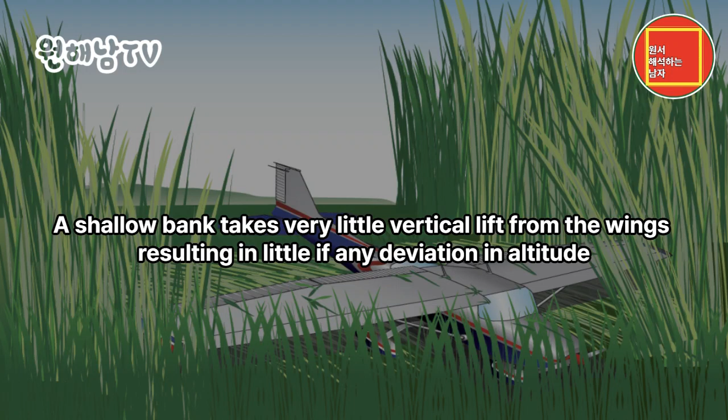Figure 18-13. A shallow bank takes very little vertical lift from the wings, resulting in little if any deviation in altitude. It may be helpful to turn a few degrees and then return to level flight if a large change in heading is necessary. Repeat the process until the desired heading is reached. This process may relieve the progressive overbanking that often results from prolonged turns.

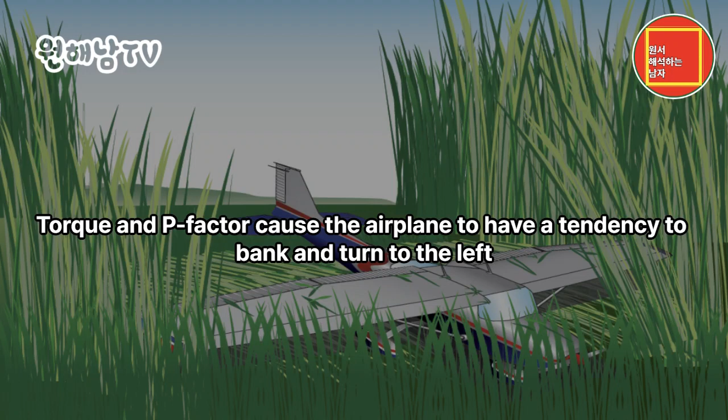Torque and P-factor cause the airplane to have a tendency to bank and turn to the left. This should be anticipated and compensated for. If the initial power application results in an inadequate rate of climb, power should be increased in increments of 100 revolutions per minute, or one inch of manifold pressure, until the desired rate of climb is attained. Maximum available power is seldom necessary. The more power that is used, the more the airplane wants to bank and turn to the left.

Resuming level flight is accomplished by first decreasing pitch attitude to level on the attitude indicator using slow but deliberate pressure, allowing airspeed to increase to near cruise value, and then decreasing power.

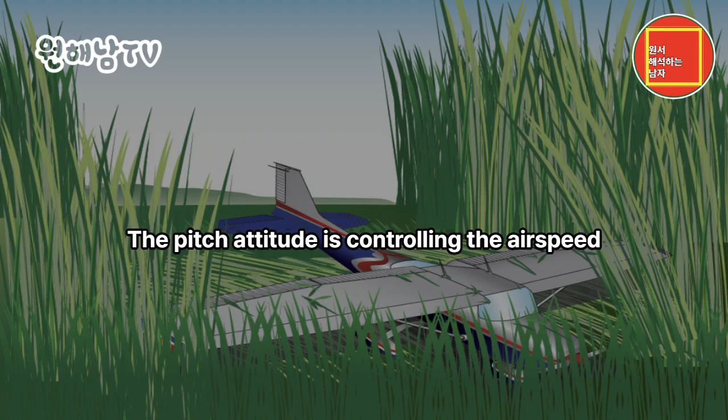Descents are very much the opposite of the climb procedure if the airplane is properly trimmed for hands-off straight and level flight. In this configuration, the airplane requires a certain amount of thrust to maintain altitude. The pitch attitude is controlling the airspeed. The engine power, therefore, translated into thrust by the propeller, is maintaining the selected altitude.

Following a power reduction, however slight, there is an almost imperceptible decrease in airspeed. However, even a slight change in speed results in less download on the tail, whereupon the design nose heaviness of the airplane causes it to pitch down just enough to maintain the airspeed for which it was trimmed. The airplane then descends at a rate directly proportionate to the amount of thrust that has been removed.

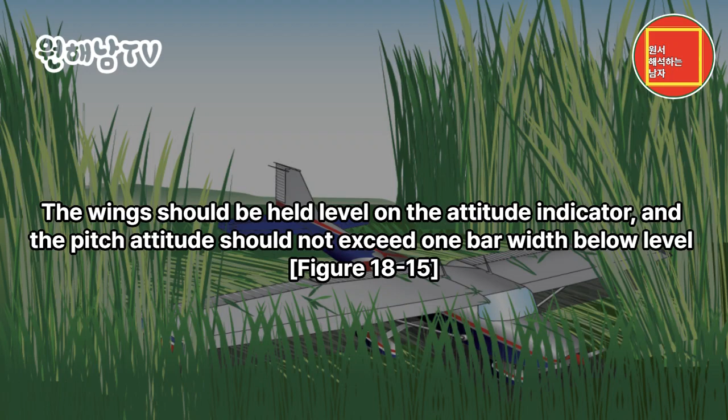Power reduction should be made in increments of 100 revolutions per minute or one inch of manifold pressure, and the resulting rate of descent should never exceed 500 feet per minute. The wings should be held level on the attitude indicator, and the pitch attitude should not exceed one bar width below level.

Combined maneuvers, such as climbing or descending turns, should be avoided if at all possible by an untrained instrument pilot. Combining maneuvers only compounds the problems encountered in individual maneuvers and increases the risk of control loss. The objective is to keep the airplane under control by maintaining as much of the airplane's natural equilibrium as possible. Deviating as little as possible from straight and level flight attitude makes this much easier.

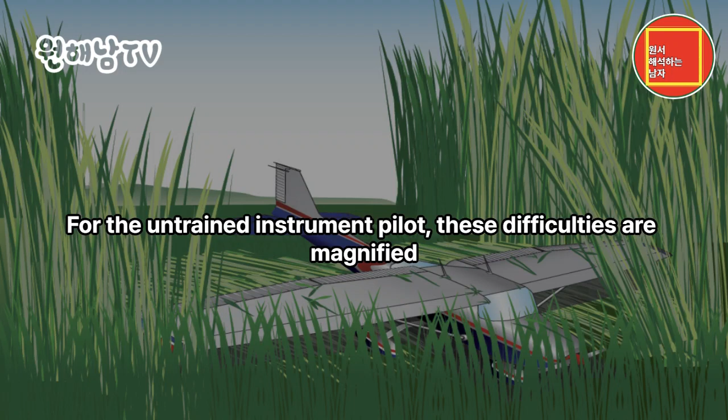One of the most difficult tasks a trained and qualified instrument pilot contends with is the transition from instrument to visual flight prior to landing. For the untrained instrument pilot, these difficulties are magnified. The difficulties center around acclimatization and orientation.

On an instrument approach, the trained instrument pilot prepares in advance for the transition to visual flight. The pilot has a mental picture of what to expect when the transition to visual flight is made and will quickly acclimate to the new environment. Geographical orientation also begins before the transition, as the pilot visualizes where the airplane is in relation to the airport runway. In an ideal situation, the transition to visual flight is made with ample time, at a sufficient altitude above terrain, and to visibility conditions sufficient to accommodate acclimatization and geographical orientation.

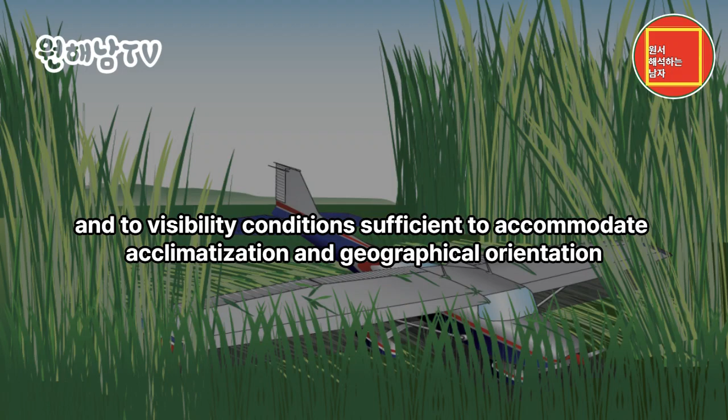This, however, is not always the case. The untrained instrument pilot may find the visibility still limited, the terrain completely unfamiliar, and altitude above terrain such that a normal airport traffic pattern and landing approach is not possible. Additionally, the pilot is most likely under considerable self-induced psychological pressure to get the airplane on the ground.

The pilot should take this into account and, if possible, allow time to become acclimatized and geographically oriented before attempting an approach and landing, even if it means flying straight and level for a time or circling the airport. This is especially true at night.

Emergency response systems: airplanes may have installed systems that provide alternatives in certain emergency situations.

For example, ballistic parachute systems, if installed, may be deployed in an emergency, allowing an airplane to descend slowly enough toward the ground such that occupants usually survive the resulting impact with minor or no injuries. Airplanes may also have an emergency auto-land (EAL) system, which can take over control of the aircraft when necessary for a safe outcome.

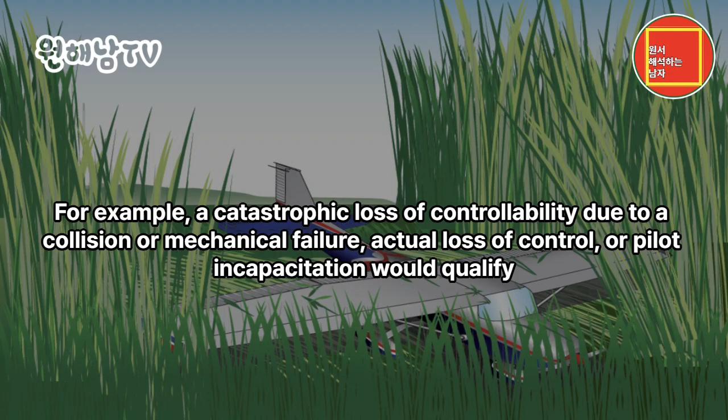Deployment of an airplane ballistic parachute system results in the loss of the airframe, but deploying such systems within an acceptable flight regime prevents injuries and saves lives. Pilots need to understand and follow the procedures for arming and disarming these systems before and after flight, and understand the conditions under which the system would be deployed. For example, a catastrophic loss of controllability due to a collision or mechanical failure, actual loss of control, or pilot incapacitation would qualify. Pilots should brief passengers with access to any deployment mechanism regarding the conditions for a safe deployment.

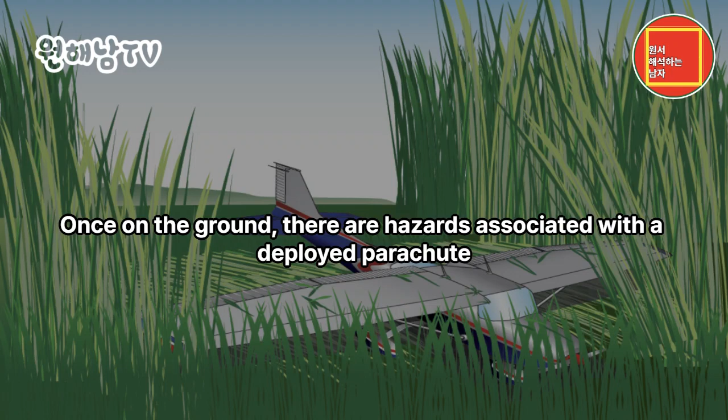Generally, the passenger would deploy the system only if the pilot were incapacitated. At a minimum, the pilot should also brief the passengers regarding the basic sequence of steps for deployment. Pilots should study the information provided by manufacturers and suppliers of these systems and follow the guidance provided. The system design may include airplane components designed to absorb the forces of vertical impact. The design of landing gear and seats maximize the protection afforded to the occupants and extend the time over which impact forces are absorbed. Once on the ground, there are hazards associated with the deployed parachute, and the effect of surface winds, and the occupant should know the procedures for evacuation.

Auto-land. If the EAL senses erratic flying, it stabilizes the aircraft and checks for pilot responsiveness. Without further input, the EAL initiates an emergency descent. Without pilot responsiveness after an emergency descent, EAL initiates the process for an automated landing. The system also allows for manual activation by a pilot or a passenger.

Once activated, the EAL system transmits automated radio broadcasts on the aircraft's last selected frequency and on guard, 121.5 MHz, to alert controllers or pilots in the area of the EAL aircraft's imminent arrival to the selected runway. The system repeatedly transmits the call sign and intention to divert to a particular airport and runway using a recognizable non-human synthesized voice. Additionally, EAL sets the transponder to squawk 7700 to indicate an emergency.

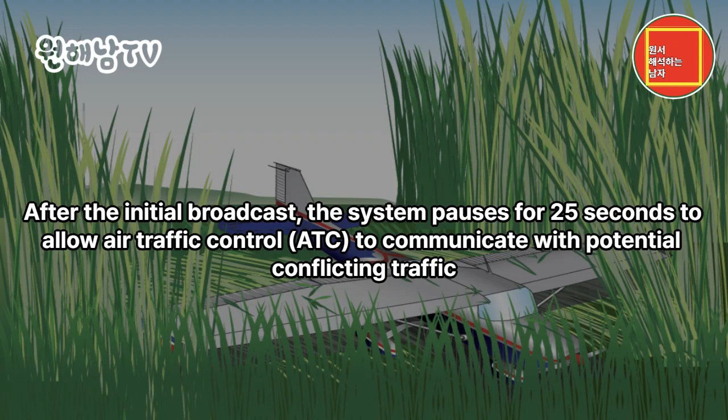After the initial broadcast, the system pauses for 25 seconds to allow air traffic control (ATC) to communicate with potential conflicting traffic. Once the EAL aircraft is within 12 miles of the selected runway and at or below 12,000 feet MSL, it broadcasts on the tower frequency or Common Traffic Advisory Frequency (CTAF) and continues to broadcast its position via ADS-B. It announces its call sign, pilot incapacitation, its position relative to the destination airport, gives the airport identifier, and the time to landing on a specific runway at that airport. The system makes a similar 1-minute out broadcast prior to landing.

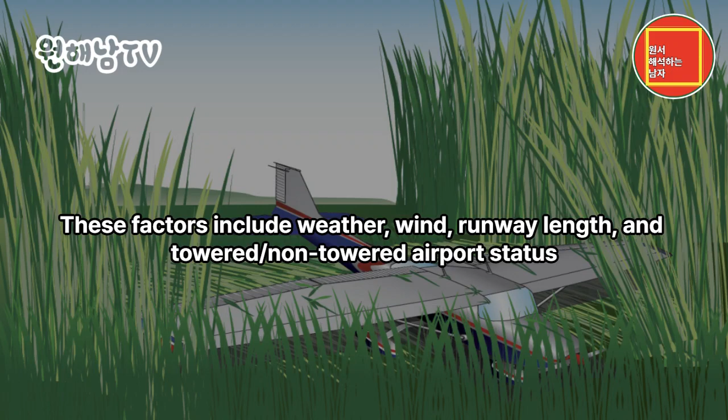The EAL system selects a suitable landing airfield based on several factors. These factors include weather, wind, runway length, and towered or non-towered airport status. EAL only considers airports with an area navigation or GPS approach, selects towered airports over non-towered airports where possible, and uses runway requirements that depend on the aircraft type. EAL systems also utilize obstacle and terrain databases. If the system loses GPS coverage, the airplane continues straight flight without attempting to land until GPS coverage resumes.

Currently, EAL system capabilities do not include detecting and avoiding other aircraft, receiving or reacting to ATC instructions or notices to airmen (NOTAMs), avoiding military operations areas (MOAs), special use airspace (SUA), restricted areas, or temporary flight restrictions (TFRs), or turning on aircraft lights.

Chapter Summary. This chapter provided general guidance and recommended procedures that may apply to light single-engine airplanes involved in certain emergency situations. The information presented is intended to enhance the general knowledge of emergency operations, with the clear understanding that the manufacturer's recommended emergency procedures take precedence. Information was provided concerning failure of the pitot-static system in aircraft with EFIS.

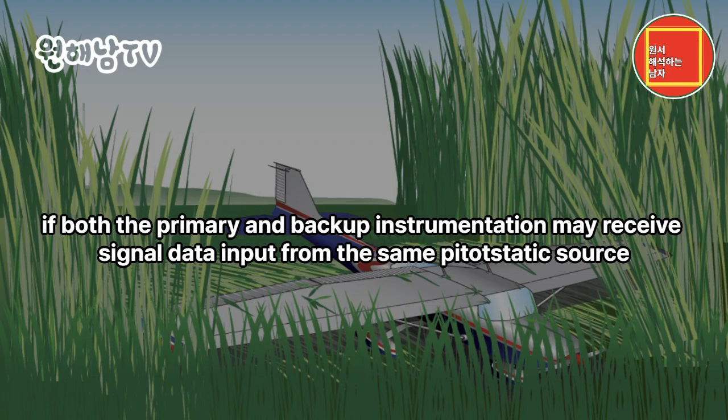The redundancy of backup systems for IFR flight may be less than desired. If both the primary and backup instrumentation may receive signal data input from the same pitot-static source, the failure indications of EFIS may be entirely different from conventional instruments, making recognition of system malfunction much more difficult for the pilot. Lack of system standardization compounds the problem, making equipment-specific information and knowledge an important asset when analyzing electronic display malfunctions. The inability to simulate certain failure modes during training and evaluation could make the pilot less prepared for an actual emergency. As electronic avionics become more advanced, the training and proficiency needed to safely operate these systems should receive careful analysis.

End of AFH Chapter 18.